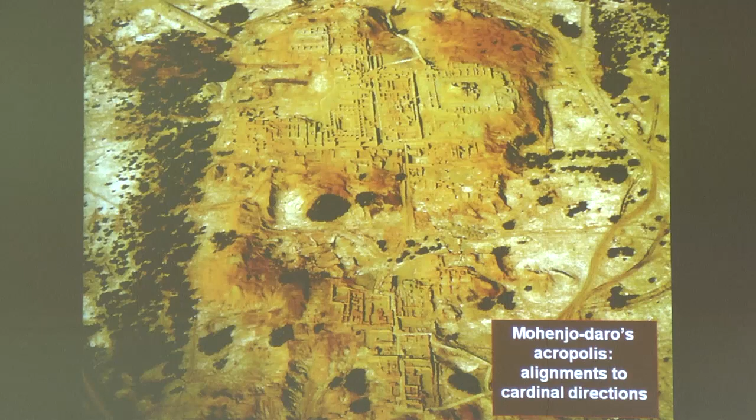But one thing which is immediately striking is that if you look at a plan like this, this is the plan for the Acropolis, that is to say the upper city of Mohenjo-daro, which sits on a mound, as you can see, and this mound is actually an artificial platform made of mud bricks of something like 7 meters in height, which was meant to somewhat insulate it from the regular floods of the nearby Indus River, which in those days were, of course, much more powerful in amplitude than they are today because of the number of dams which have been constructed on the river. And so millions and millions of mud bricks have been brought here, and then this was built over.

And you can see immediately that there is an intention. There is a plan. Some people, we will never know who, call them architects, call them civil engineers, sat down and decided that they wanted to build a city exactly like this. And like this means streets perfectly at 90 degree angles, aligned in addition to the cardinal directions. This is north, south, east, west, very precisely. And monumental structures, huge buildings, strangely, whose purpose most of the time is still uncertain.

The reason is that, for instance, in ancient Egypt, in every city, not quite, but very often, you can immediately point to the palace. You see the place where the pharaoh lived. It kind of stands out. It was meant to stand out. There was an architectural message given that this is where the ruler lives. There is no such architectural message ever given in the Harappan world, and you never know actually where the ruler might have been really living. Somewhere here, because this is the upper part of the city; the lower part is a huge area. We'll see only a small bit of it to the east of the Acropolis.

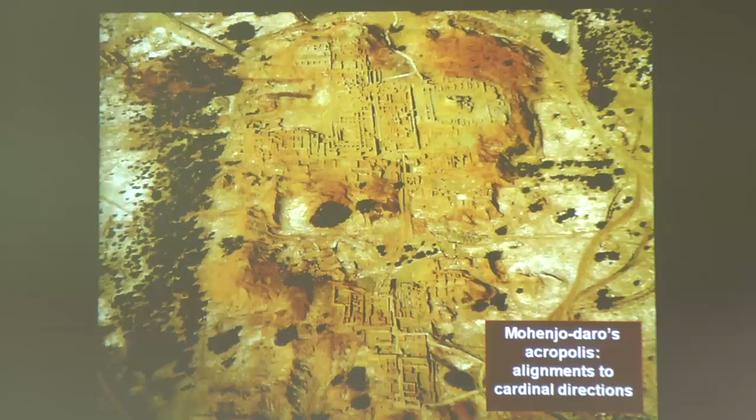And you see here a building which we will revisit. This is the Great Bath. This is an enormous building of nearly 23 meters in width and 69 in length. Perhaps it was where the ruler lived, but we don't really know because it's just an endless layout of rooms. There are pillared halls here. In fact, I could show you the plan more clearly with these indications. This is a pillared hall. This is the Great Bath, and this is the so-called college.

All these terms are a little bit arbitrary, including the term of granary, which many of you would have learnt in your school textbooks. And this colossal building with huge platforms, in fact, today nobody really knows anymore what it was used for. There is no direct evidence that it was ever used to store grain because no remains of grains have been found there. This is the closer view of the granary with all its platforms. The safest label that some archaeologists today propose is that of a warehouse, but to store what is again a mystery. It was quite enormous in size.

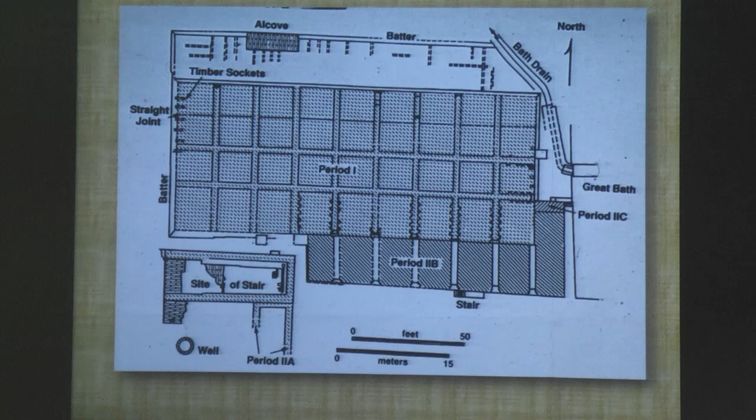You can see the complex of the Great Bath next to it. And there were all kinds of structures there to lower goods to platforms of different levels. But at the end of the day, what was being stored remains a little uncertain. These are some of these platforms here, which belong actually, strictly speaking, to different periods. They were not all of the same epoch. And there are some remains of timber sockets showing that there must have been a huge superstructure made of wooden beams over which some kind of a roof would have been laid. So this was certainly for storing something, but whether it was grain is not quite proven yet.

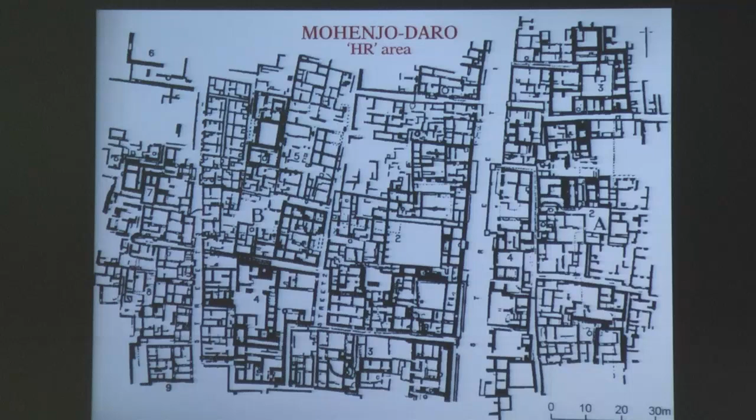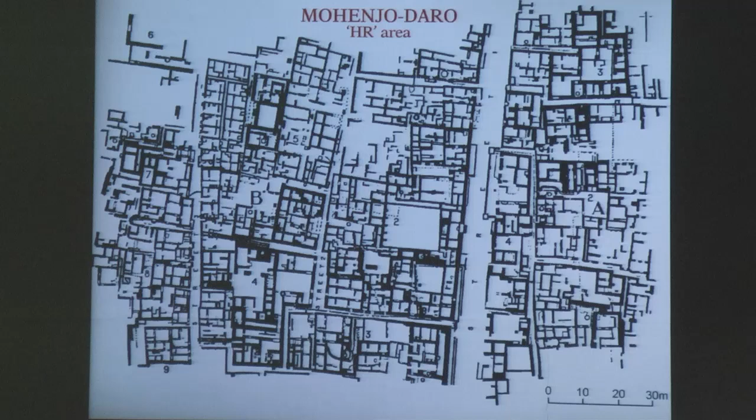And there are what seem to be big blocks between those streets. There are blocks which have been identified. And these blocks actually have individual platforms of mud bricks. They are not just constructed in a haphazard way. And these platforms have specific levels which will allow the whole sanitation system, which we'll see a little later, to work fairly smoothly.

So there is a considerable amount of planning which took place. And this is, in fact, more so than in cities of ancient Egypt or Mesopotamia, where usually only the area which was immediately around the pharaoh's palace or the king's palace in Mesopotamia had some form of planning, but otherwise the rest of the city at large resembled more what our modern Indian cities may look like.

And if you look at most Indian cities today, they're just not planned. They're just villages that kept growing and growing in an organic fashion. And you cannot make out a perfect geometric grid as we could do in the Acropolis and to some extent here also.

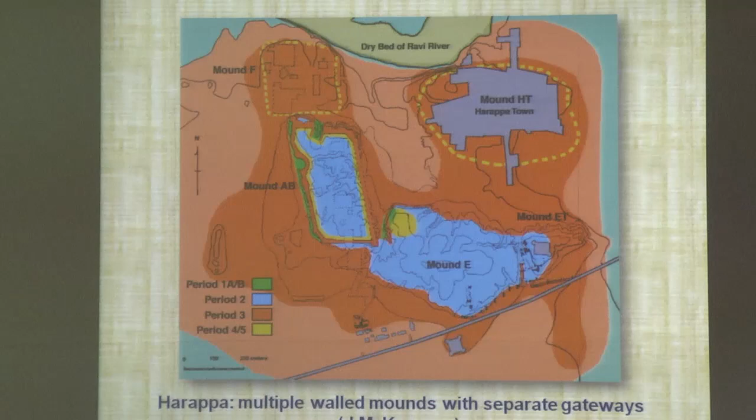This is a view of Harappa, where Harappa is a very complicated story because it was actually mined for its bricks in the 1850s, long before it was identified, long before it was understood to belong to a Bronze Age civilization. These bricks were so attractive. They seem to have modern proportions, I'm coming back to the bricks a little later. And the British railway engineers who were laying a railway line between Multan and Lahore needed something for their ballast.

And in Punjab and Sindh, you have almost no sources of stone. So they found this big mound which had millions of bricks, and they started mining them. They in fact laid a small railway line to evacuate the bricks from Harappa towards the railway line which they were constructing. And as a result, of course, they destroyed much of the city. So there are big gaps in the understanding of the total layout of Harappa.

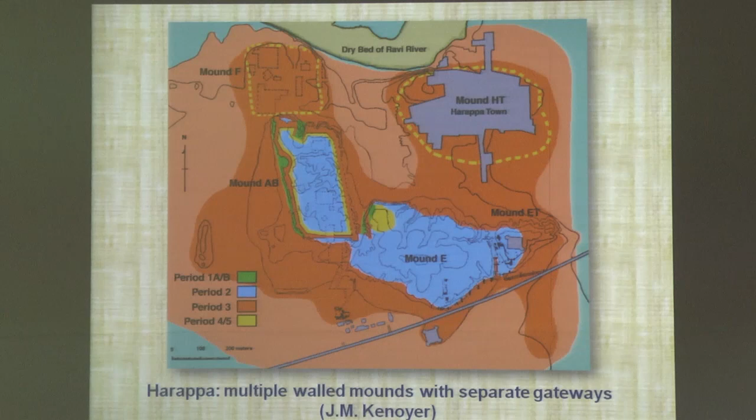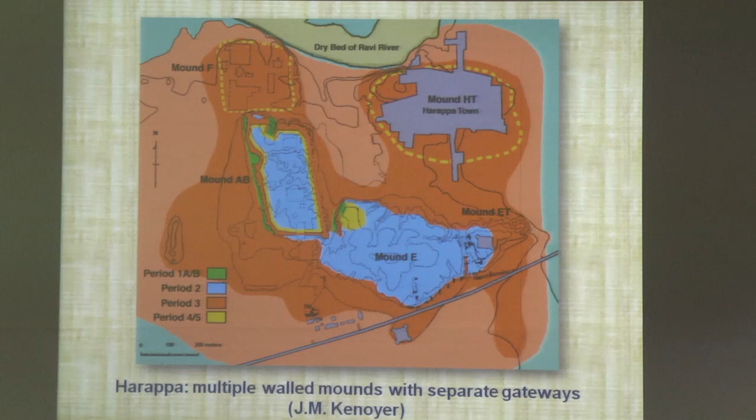Nevertheless, it's been under excavation by many archaeologists, including successive teams of American archaeologists, who have brought out a huge amount of data. And what we can see here is that it's not two regions as at Mohenjo-daro, but a number of mounds. There are at least 1, 2, 3, 4, 5 which have been identified. There might even be some more further away. And these mounds had their own separate fortified enclosures. So the exact relationship between them is not yet fully understood. They had their own separate gateways also. In fact, I think that I will have one picture of a gateway to show you later.

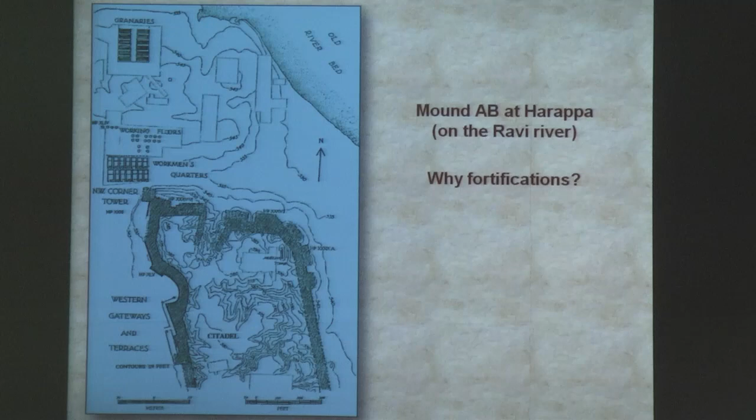But this is a close-up of the so-called AB mound here, where you can see the type of fortification enclosing the mound. And this faces, in a way which we will find again very shortly in India, the riverbed, and this is what is known as a recessed entrance. It's a narrowed entrance into the fortified area, which allows control, possibly for defensive purposes, but mostly for the movement of trade goods coming into or out of the city. It is with such narrowed entrances that you can easily control what's going on.

But then the question that people have asked is why have fortified cities at all? Because, once again, in many parts of the world, cities have happened without any fortifications. So why should Harappans be so keen on fortifying their cities? Many theories have been put forward. One, of course, is that they were used as defenses.

And this is how, in fact, Mortimer Wheeler, who first identified those fortifications here, as soon as he joined the Archaeological Survey as its Director General in the 1940s, I think 1946 if I'm not mistaken, or 45 perhaps, declared them to be defenses. And then he conjured up a whole warlike context. As you can see here, this was called a citadel, not an acropolis, which is a more neutral term.

The point is that perhaps some of the Harappan fortifications were intended to protect against raids by local populations or distant wilder tribal populations, possibly. But the fact is that there has never been any evidence of this at any Harappan site. There's no evidence of man-made destruction anywhere, no evidence of warfare of any sort. It may yet come up in future excavations, but as of now, Harappan civilization seems to be strangely unwarlike.

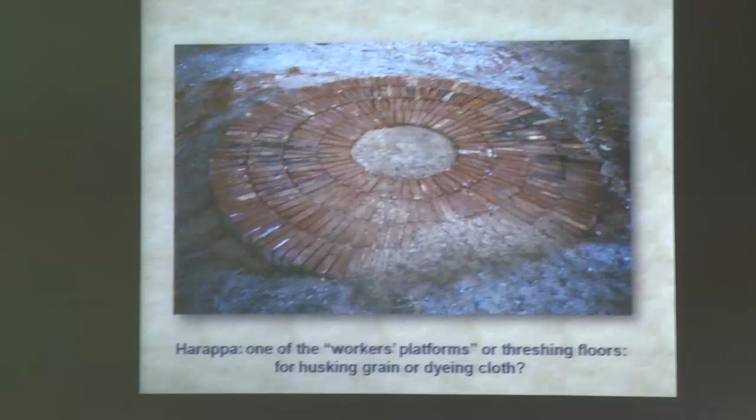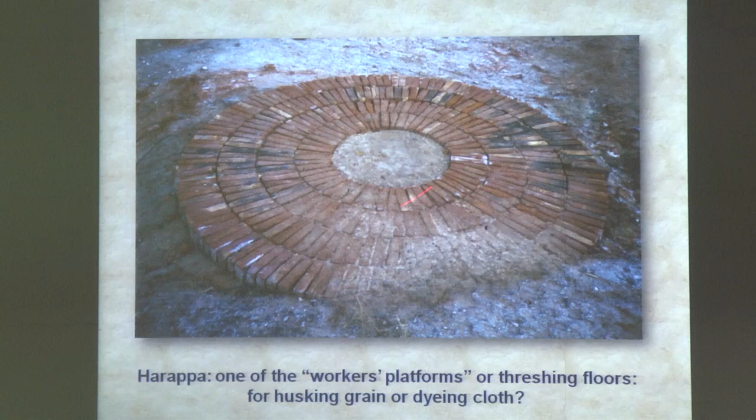Platforms have been found. These circular platforms are famous in Harappa, but the exact purpose again is unknown. Initially, they were thought to be used for husking grain, or perhaps having a mortar here. But this also has been questioned. They could also have been used as platforms for dyeing cloth. Again, these hypotheses are not fully answered.

Kalibangan also is known for this particular house, where we have its owners indulging in the luxury of having those flooring tiles. You see huge floor tiles of terracotta with the typical Harappan design called intersecting circles, which we will find on pottery and other artifacts. And this is also remarkable, because obviously it is a superfluity of life. It is a kind of luxury. It's a sign of a certain economic affluence. And those terracotta tiles were quite well baked and very, very well laid also. Otherwise, they would have been broken by usage, but they are still in quite good condition.

Banawali, there's not much to say. This is a site on the Saraswati again. The Saraswati flows here. It's a site which unfortunately has not been much excavated, only partly, but yet we find here a different kind of layout. So you see there are variations.

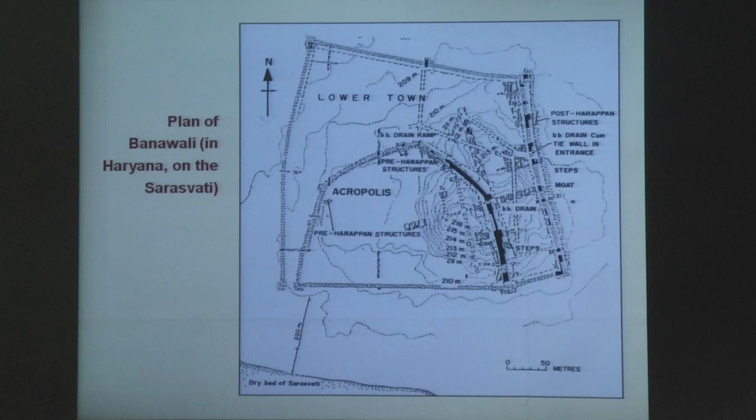The Acropolis is here, this kind of semi-oval shape, whereas the total city is somewhat squarish. So there are variations in the town planning. It's not as if the town planning is strictly imposed in every case, but then there are enough features from city to city which are quite recognizable, including the drainage system, but this I will come to a little later.

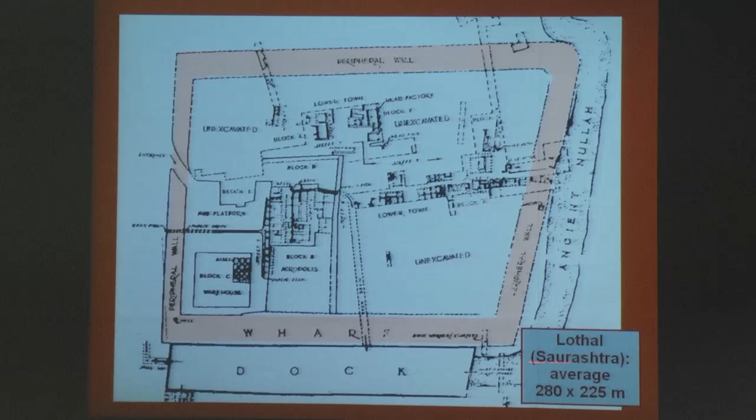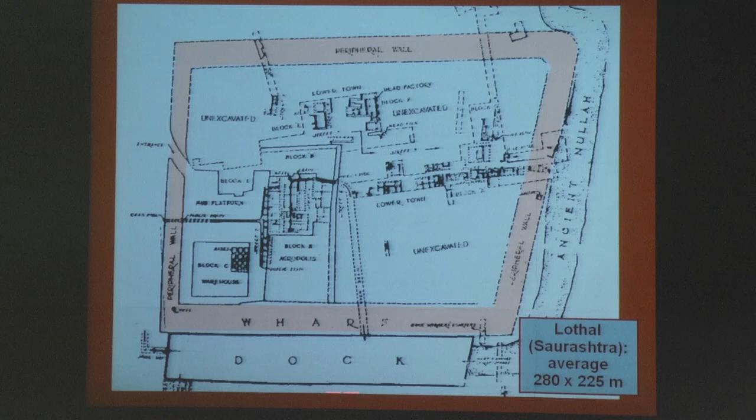So we continue our brief travel through this civilization with Lothal, which is actually, this is wrong. It is not exactly in Saurashtra, just on the border of it. It is south of Ahmedabad. And this is a small site, but of great importance because of its famous dockyard. I'll return to it in a moment.

You have here fortifications enclosing the city, or the town rather, and this is the Acropolis, or upper part of it. And we can probably suspect that the rulers would have been living in this complex here. The rest is a lower town consisting of all kinds of habitations, small workshops, various manufacturing units.

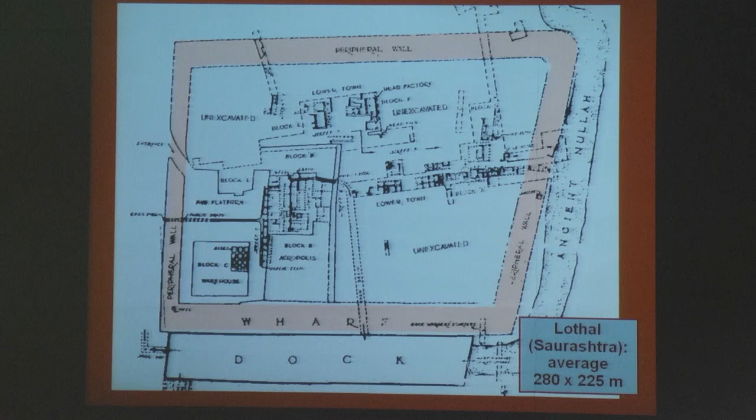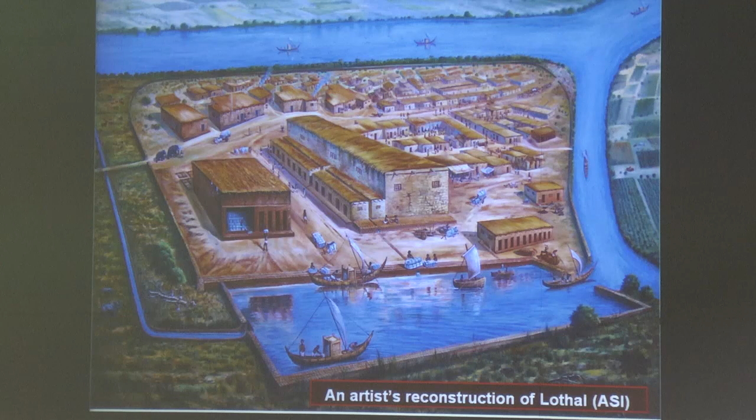This is another photo of the dockyard, 217 meters in length. Even today, it can still store water after the monsoon. And its walls were made of fired bricks, baked bricks of high quality, though they are disintegrating fast nowadays. And the whole town was on this side of the dockyard. The dockyard was identified as a dockyard.

There was some controversy. Was it really a dockyard for boats to come from a tributary of the Sabarmati River all the way up here? Or was it simply a kind of water storage facility? But in that case, such a huge reservoir for such a small settlement would not have made much sense. In fact, the point is that marine organisms have been collected from the sediments at the bottom, and therefore there is a proven contact with the sea, plus the fact that the walls are vertical.

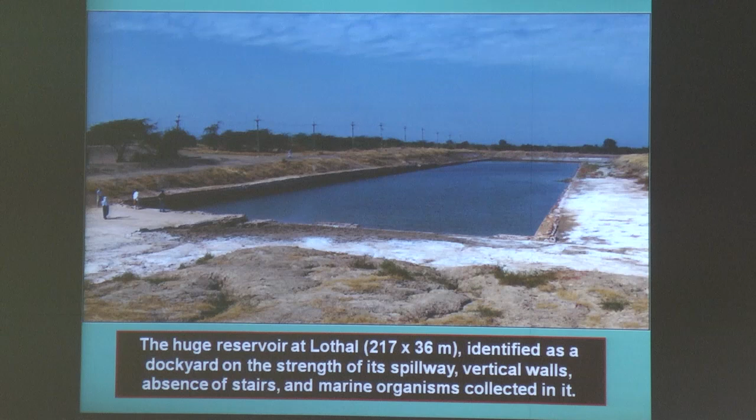If it is a water reservoir, as we'll see in Dholavira very soon, you would expect steps leading down so that you can go down to the water level as it recedes. This is not the case. And then spillways here at both extremities, which seem to indicate a control over the water level. So all these points together seem to argue in favor of the dockyard.

So this is known to be a warehouse because at some point it caught fire. It must have had, as most Harappan buildings, a superstructure of timber and some kind of thatching. And luckily for us, during this fire, more than 60 Harappan seal impressions, not the seals themselves, but impressions over lumps of clay, were actually accidentally burnt, baked by this fire, and therefore well preserved.

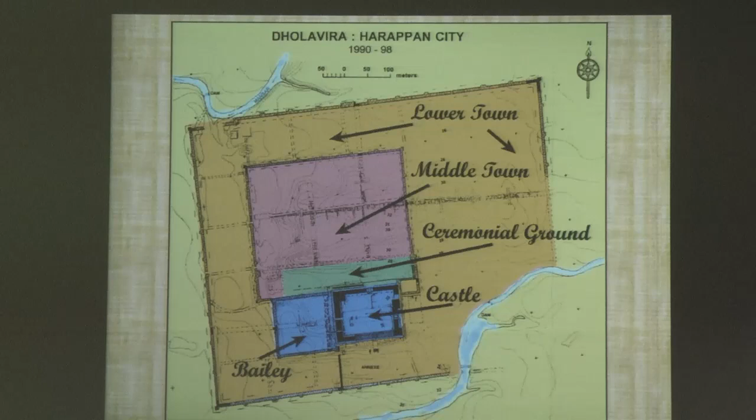And here we have not a division into 2 parts, but a division into 3 parts. There is an upper city, middle, and lower. The upper is here in blue. There is a so-called castle, which is a heavily fortified area. We'll see it a little better later. And a bailey with lots of habitations. The rulers, again, are probably residing in this so-called castle. It would make a lot of sense from an architectural point of view. And it's on a higher ground also.

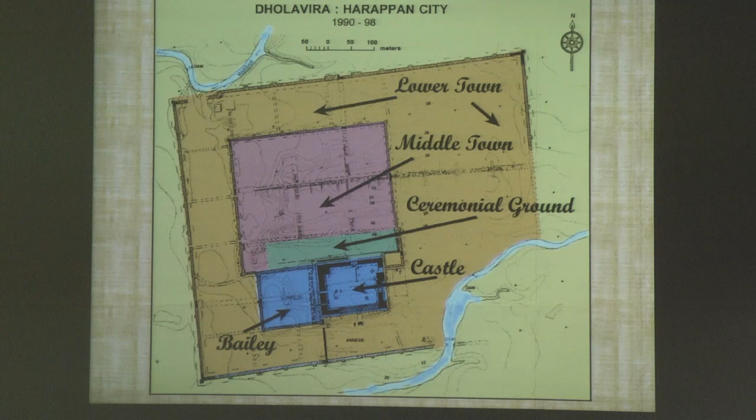And then you have here the middle town, enclosing also a huge ceremonial ground of something like 285 meters in length, which is a flat ground with a plastered ground. It was a kind of a pink clay plaster which was applied all over it, and stairs on both sides, actually platforms creating stairs a little bit like this auditorium so that people could sit at different levels.

So what exactly was happening on this ground? Well, we can use our imagination: some rituals, some sports, or some games, or some marketing, melas. We don't really know, or perhaps all of them. The middle town had most of the habitations, and there were some more here in this part of the lower town, but all the rest of the city was used for water storage. I'll come back to that in a minute. Let me proceed with a few pictures of Dholavira.

Why exactly such thick walls? If it was purely for defensive purposes, you don't need this kind of thickness. It's not necessary. There can be many explanations, including possibly the rulers having their residences right on top, because it would be much cooler exposed to the breeze than if they lived right in the middle. This is actually proposed by the excavator, Dr. Bisht, and it makes a lot of sense.

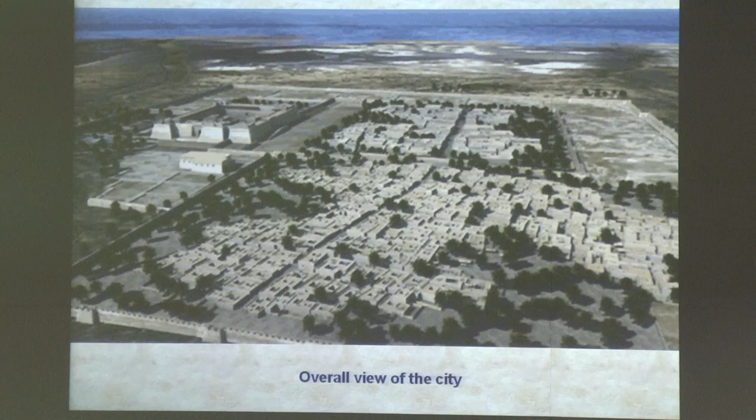I forgot to say that these fortification walls, this is another view, actually have a core of mud bricks, but both sides are built with massive stone. This is stonework because there was a stone quarry a few kilometers away on this island in the Rann of Kutch, and stone constructions are not seen in Sindh or Punjab because, as I said, there's no stone at all. But here, because it was available, the Dholaviran engineers made the most of it, and most of the foundations were laid in stone. So for the fortification walls, we have a core of mud bricks and 2 flanks of stonework, which you can see here.

And in fact, these were a kind of mineral material which was embedded in a wooden plank. Now, the wooden plank has disintegrated. There's almost no wooden remain at all in the entire Harappan civilization, unfortunately. And this material remains, but the dimensions suggest that this might have been a signboard hanging right over this northern gate of the castle.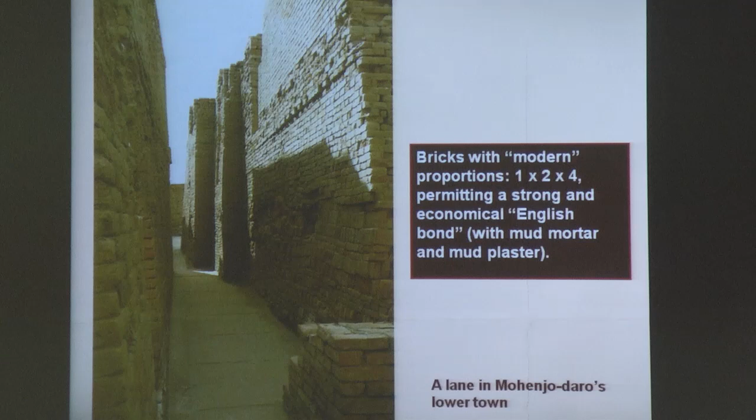In fact, I should have said briefly that you see these multiple layers. What looks like different layers are not different stories. You can see the difference in height. They are simply different levels of reconstruction of the city as it gets flooded by the Indus. And when the Indus floods, it deposits huge amounts of sediments, which it has carried all the way from the Himalayas. So the Mohenjo-daro builders, strangely, rather than try to evacuate the sediments every time, preferred to rebuild their habitations on higher and higher grounds. This is what this photo seems to say.

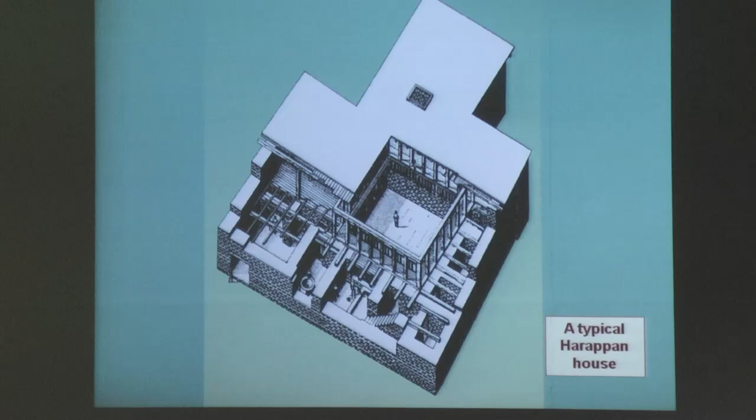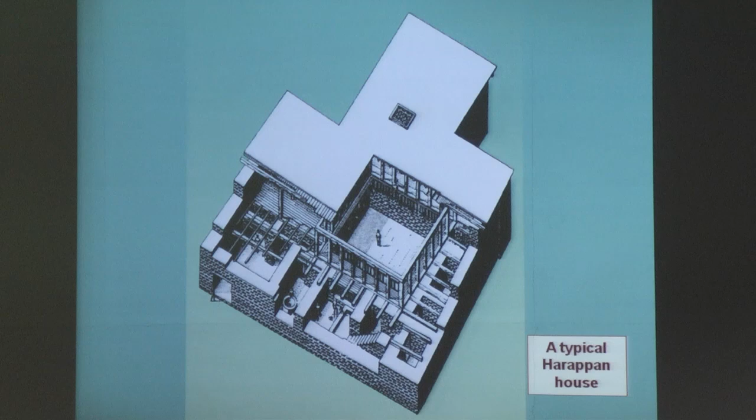This is a design of a typical Harappan house with a central courtyard and rooms organized around it. And this is a design that will live on, that can still be found in many traditional houses in rural parts of India because it's so convenient and well adapted to hot climates in particular. This is one photo of a very large single house in Mohenjo-daro, where you can see multiple rooms.

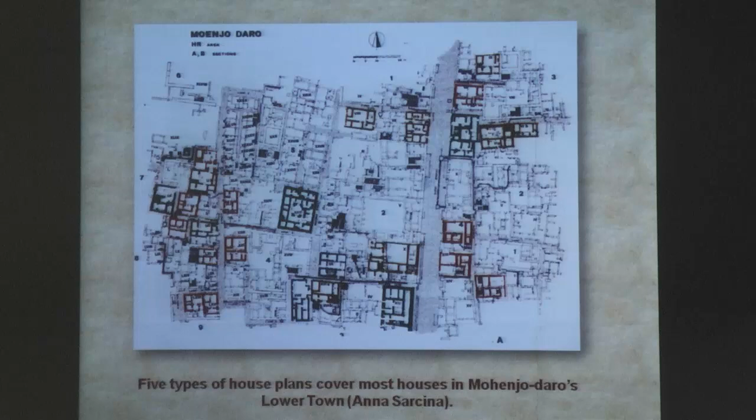But let me rather show you this plan, because one lady, Anna Sarcina, an Italian scholar, long ago did a meticulous study of all the house plans and found that there were 5 types of them, and basically not more. There could be variations, but basically there were 5 master plans for the houses, which were repeated on and on. She has classified these and given the specific details for each of them. You could almost call them BHK1, BHK2, something like that. It's not exactly the idea. It's not purely size, but this is how it works.

The largest have this central courtyard around which all the rooms are organized. So even in the types of housing, somebody has given a standard to be followed, at least in Mohenjo-daro. This is quite remarkable. That means nothing much is left to chance.

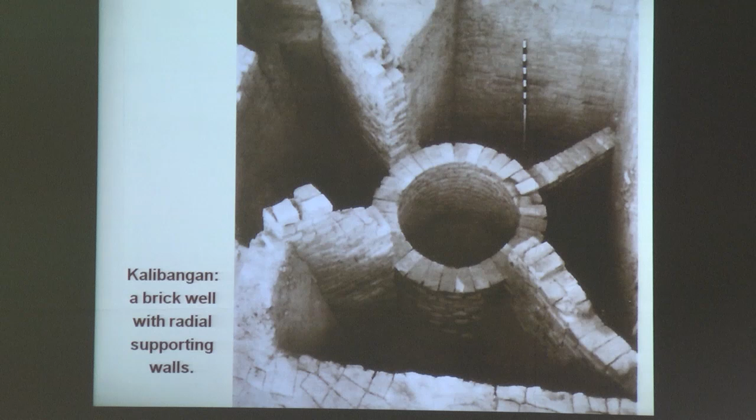So that's the difference. So the Harappans, and this is from Kalibangan, of course had a huge excavation around. They made a very big cavity, which is a lot of work, if you consider that Mohenjo-daro had an estimated 700 cylindrical brick wells. And here what we see, and it's very interesting, is that they built from the bottom, as I said, which with a high water table must have created a lot of difficulties. We're not really sure how they did it.

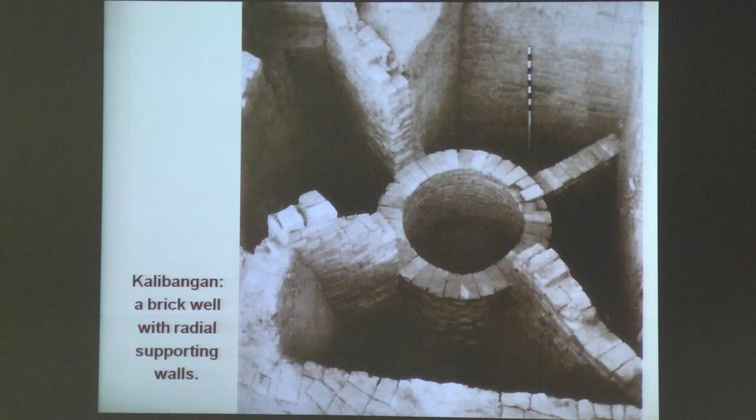But then also, before closing this huge excavation, filling it back with mud, they created these buttressing, supporting walls so that the structure would be very solid. So they had a certain sense of the strength and weakness of structures.

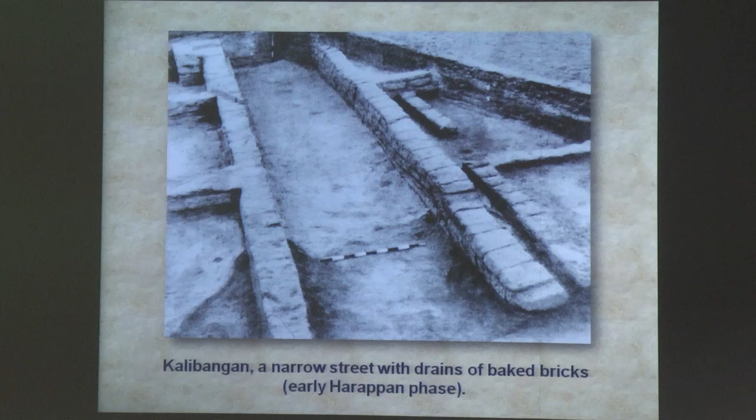Sanitation is a hallmark of the Harappan civilization on a much wider scale than in contemporary cities like Egypt or Mesopotamia. And interestingly, it is visible in a few sites even before the phase of urbanization, which, as I mentioned, begins about 2600 BC. This is about 200 years earlier in Kalibangan, where we can already see a neatly straight street with some drains of baked bricks running alongside. So this is even before the urban phase. So we can see that some of these inputs must have matured much earlier.

And there would be openings, kind of manhole covers or slabs at regular intervals, because it's very nice to have a drain, but if you don't have a force to maintain it regularly and clean it, it's going to be clogged in no time at all. So Harappans were aware of this, which is why we can say that there was some kind of a municipal force to maintain the drains.

But what's remarkable from an engineering point of view is that Michael Jansen, this German archaeologist whom I mentioned earlier, has measured the slopes of the drains, and he found that they are 1 to 2 centimeters per meter, more or less all over the city. So this means a tremendous amount of calculation and planning to make sure that the initial levels and the lower levels are going to allow this kind of a slope. If you visit my city of Coimbatore, any substantial rainfall will cause all the drains to overflow because they don't have a slope.

So you see, these are problems which we are still grappling with millennia later. A quick view of how it would work within a house. This is actually one house here, and you have a private well. Some of the wells in Mohenjo-daro were private, some were public. And you have the bathroom here.

So by bathroom, of course, we should not picture some of our luxurious bathrooms. These are modest bathing platforms, but still almost every house in Mohenjo-daro and Harappa had such bathing platforms. And this internal drain takes the dirty waters below the boundary wall. And you can see the very nicely adjusted curve, all this made of baked bricks.

And you can see here a sump, so the purpose of the sump is obvious. It is meant to allow any solid matter to drop down there, and for maintenance of the drain, because here this is a public lane, then it's going to be much easier. So you can see the amount of thinking that it takes, and to ensure again the proper levels so that the water can flow.

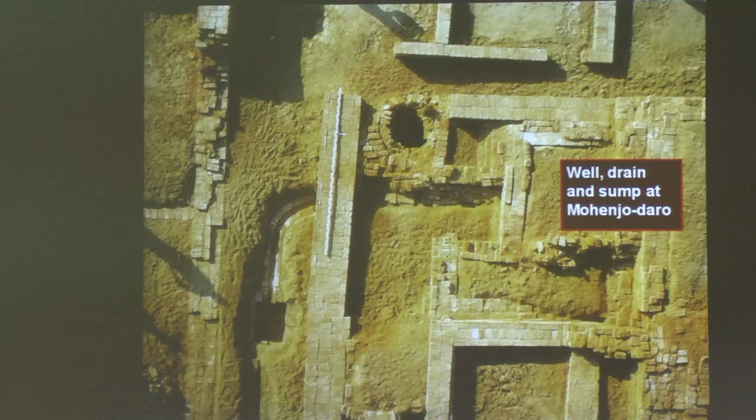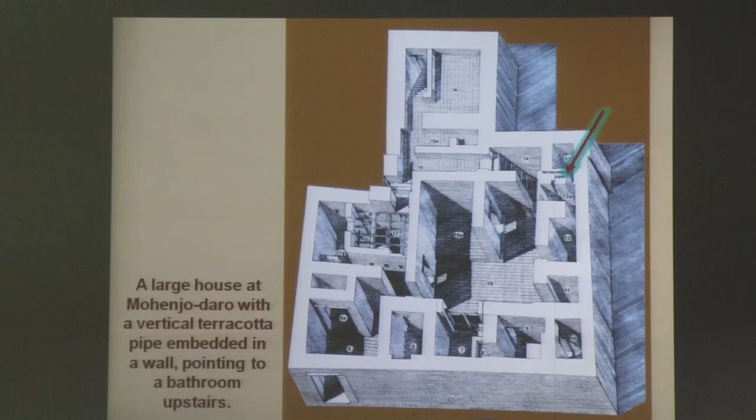A quick view of a typical large house of Mohenjo-daro. I'm showing it only for one purpose, because it happened to have a pipe of terracotta, segments of terracotta assembled together, vertically embedded in a wall. Now this is amazing and totally unexpected, because it shows that there was some water activity going on the first floor, and it must have been probably a bathroom.

So the conclusion would be that the owners of this house probably lived on the first floor, which is advantageous because it would mean a lot less dust and noise. The streets in Mohenjo-daro were not paved. They were just covered with mud. So the whole city would have been pretty dusty. And probably the servants would have worked in the ground floor.

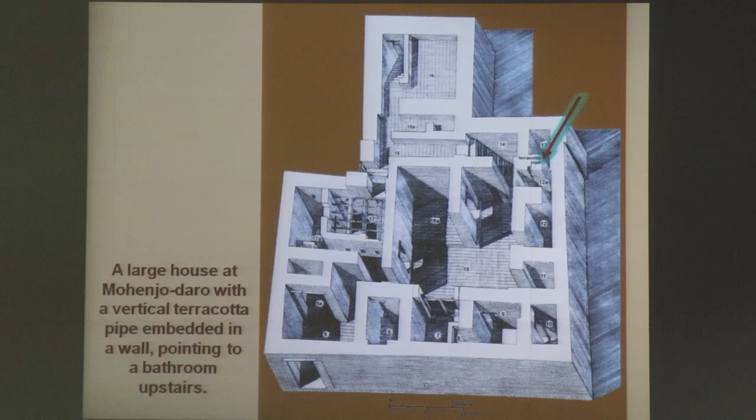Water management is one, perhaps my last but one area I would like to cover. Can I have another 10 minutes?

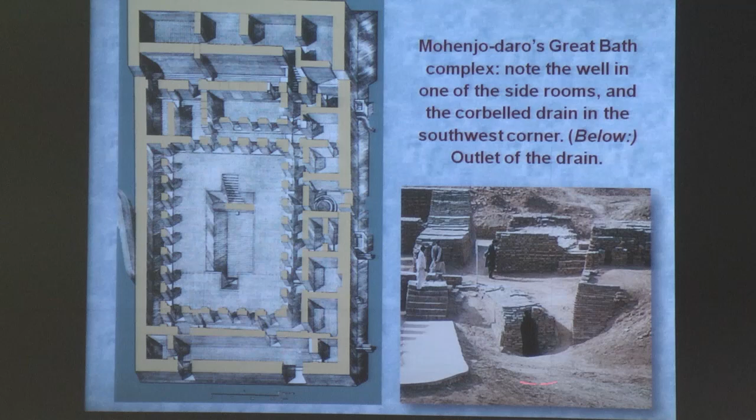This is the outlet of the drain a little further down. And you can see, in fact, here a better view of it. This is the drain. And you can see that this is what is called technically a corbelled drain. Corbelled because you have different levels of bricks till they join.

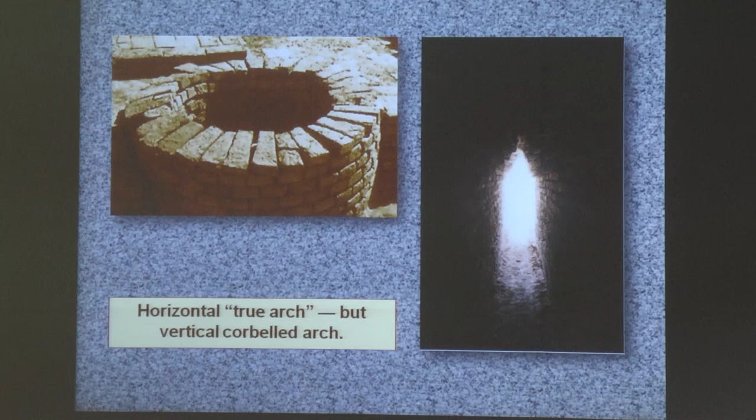Now, I'm just making a small reflection here from an engineering point of view, which is that I always wondered why the Harappans did not invent the true arch, because actually they had it. This is nothing but the principle of the arch, but it was horizontal. It never occurred to them to flip it vertically and use true arches, whereas instead they use corbelled arches. To my knowledge, the earliest true arches in India date back to the 1st or 2nd century AD. You can see them in Kaushambi, for example, on the Yamuna. But the Harappans did not know the true arch.

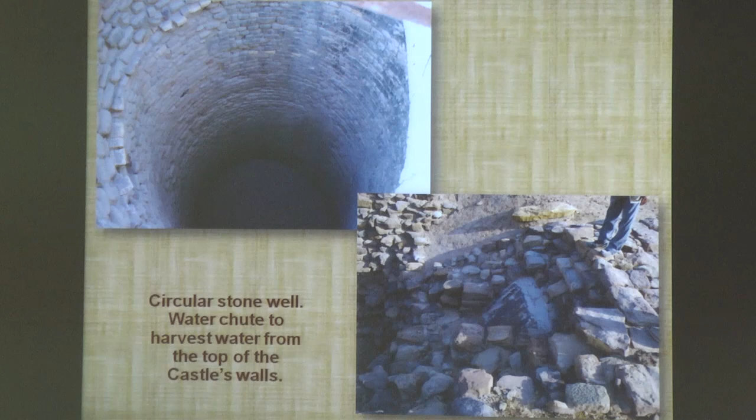This is from the top of the castle fortifications, where we can see here a strange, highly polished, big stone slab, and actually it is part of a structure which is meant to channel whatever rainfall would hit the top of the fortification walls, channel it into a kind of funnel shape all the way into those underground drains which I just mentioned. So very sophisticated thinking, planning, and execution to make sure that basically not a drop of water is wasted.

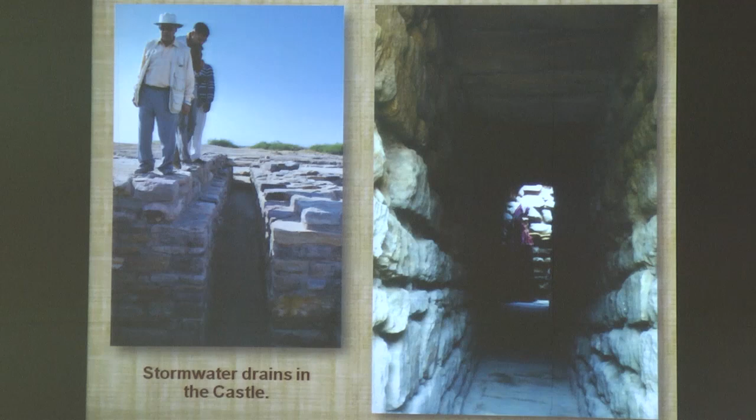It tells us that the Harappans were expecting massive rains once in a while, especially of course during the monsoon, but possibly at other times, and they didn't want to waste any of it. So therefore they built those enormous drains, even though the average rainfall is extremely scanty. So it's not a question of average, but it's a question of capturing the peak rainfall.

This is in another part of Dholavira, one such underground drain, which you can notice simply by the top covering slabs, and this manhole cover. So this manhole allows somebody to go into and clean whatever needs to be cleaned.

Now, apart from the sequence of reservoirs I showed in the earliest plan, there were some man-made reservoirs very close to the castle. And this is the colossal eastern reservoir. You can see the dimensions here for yourself. It's enormous, almost as long as a football ground, and something like 20,000 cubic meters at its peak. There are three stairways leading down into it. You can see two of them here.

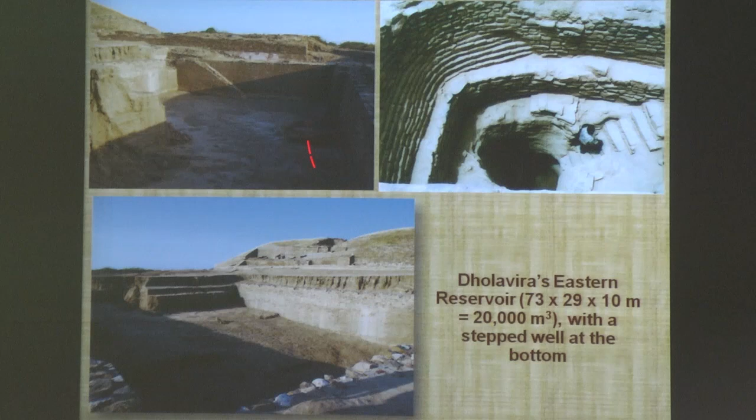And in addition, there is a curious structure known as a step well at the bottom of it. This is it here, but you can't see it today anymore. It's partly covered, which is intriguing. Was it made at the same time as the tank, in which case it would be a kind of an extension of the tank, of the reservoir, or is it a slightly later structure? It's hard to say. But this is possibly the earliest step well in India, of course, of simple architecture.

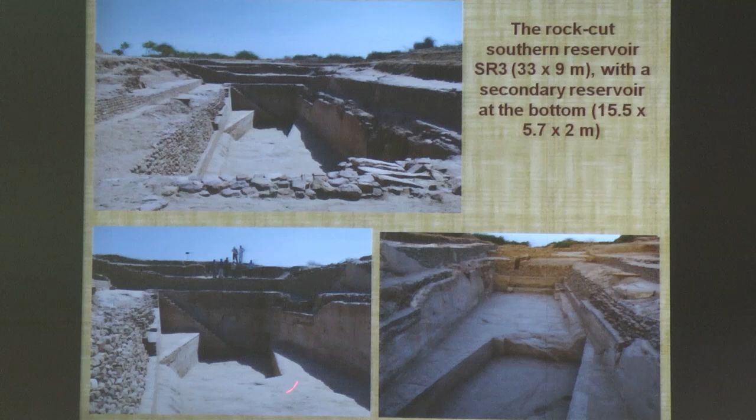This is a reservoir carved in stone, and you can see the amount of work this would represent. It's 33 meters long. It's actually a double reservoir. There's a secondary reservoir within it, and I'll come back to it in a minute. And all these reservoirs again are interconnected with underground drains. The advantage of it, obviously, is that if for any reason one reservoir happens to be full or even to overflow, it can pass on this excess of water to the others. So it's a chain of reservoirs, strictly speaking.

So you can see that there's a considerable amount of thought given to how to make this city in the Rann of Kutch, which today has no city whatsoever, livable through the year, when you might have no rainfall apart from the monsoon. And well, they tackled the problem, and the city stood for something like 600 to 700 years. So they were able to really adapt to this difficult environment successfully.

Finally, a few quick words on metrology and proportions, which strictly speaking are part of civil engineering. I will not say much about the series of weights that the Harappans were using. This is for trade, control of goods and so on. It followed two systems. The first weights, starting from 0.86 grams, followed a geometrical progression. Every successive weight was twice as heavy as the preceding one.

But then instead of continuing this series, the Harappans switched to multiples, 10 times, 100 times, or 1,000 times the previous weights. For some reason, we don't really know why. So this means that they were also familiar with the concept of multiplying by 10 or 100 or 1,000. But more important to us today are some concepts of proportions which I want to expand upon.

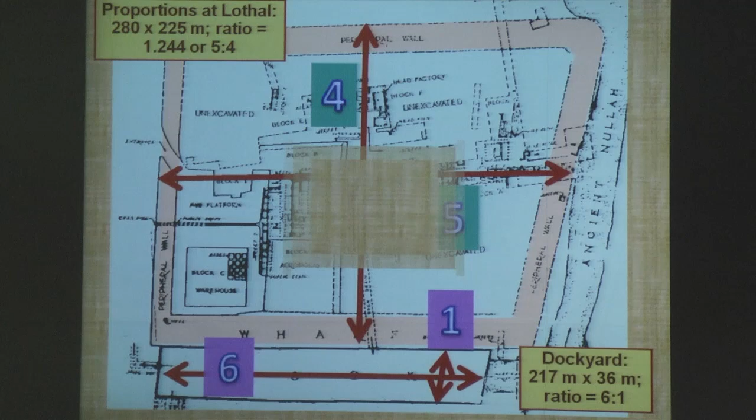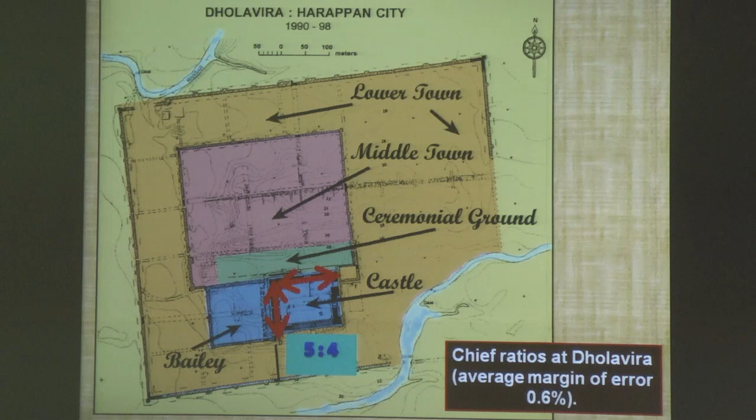Lothal also has 5:4 if you take the middle point here quite precisely. The dockyard is exactly 6:1, etc. And Dholavira is the most striking of all because it has 5:4 exactly for the castle. It has very, very precisely 5:4 over the entire city. The margin of error is 0.01% for the overall city, and that's 771 meters in length.

So why were they doing this? It takes a lot of labor, additional effort, which actually has no utilitarian purpose. It doesn't make any difference whether you have this ratio or something else in actual practice.

Then you have also exactly 9:4 repeated twice between the length of the castle and that of the middle town, and once again 9:4 to the outer city. 6:1 is for the ceremonial ground, the same ratio we saw at the dockyard of Lothal. 7:6 for the middle town. We can begin to see something going on, and it continues even for the reservoirs.

There also they did not believe in leaving things to chance. They wanted to impose strict ratios. So this is exactly 5:2, and here we have also ratios of 7:2, 11:4, etc. So I did a little study, in fact, I published a few papers on this, where I showed that every major structure unearthed so far obeyed one of these ratios. And you could be falling between some of these simple fractions, but you do not. You are always right on a simple fraction.

So there is a philosophy here behind. Is it exactly something similar to the later concepts, I insist on the word later, of Vastu Shastra? Some people rush to say that Harappans were following Vastu Shastra. No, I don't think we can make such a claim. But it is true that in Vastu Shastra, you have this concept of proportions given.

For example, Varahamihira says that for the quarters of the king, the length should be equal to the width plus 1/4 of the width. Now, width plus 1/4 of the width means that the length is exactly 1.25, 1 1/4. So that's 5:4. That's the ratio 5:4 which we have found here. And you see, it's there in many traditions of India.

For example, the builder of the Jantar Mantar observatories, Maharaja Jai Singh, his title was Sawai Jai Singh. What does Sawai mean? It means exactly 1 1/4. So this tradition is a notion of increase. You add a quarter because it's considered a sign of growth, perhaps expansion.

And finally, I played around with the numbers and calculated what could be the likeliest unit of length that the Harappans used to design Dholavira, and I found that the unit of 1.9 meter gave beautiful numbers all around, but this is a detail, we can leave it for the time being. I think I will just skip those details, except that these are the ratios for all the reservoirs, and I found that my unit, even at short lengths of reservoirs, was giving almost perfect results. So anyway, let me skip those details.

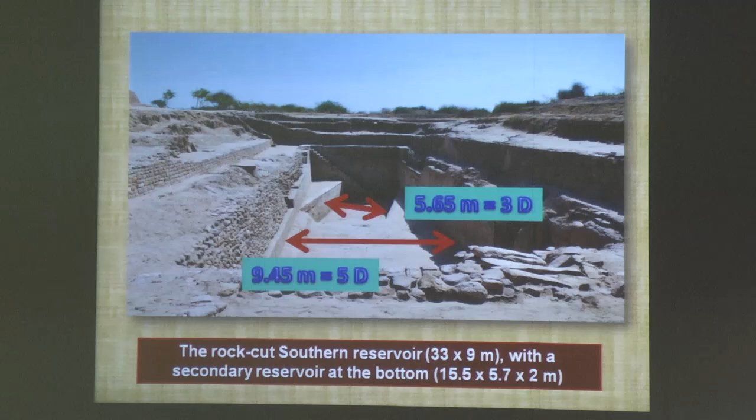They are rather secondary. The point is that we find a sense of order and a systematic use of proportions and possibly linear units in the Harappan world. Even small units like this angula, but I will leave these details for your later study. It doesn't matter much for today.

I want to conclude on a remark that this standardization on town planning, as I showed, is not a rigorous standardization, not that all sites follow exactly the same plan, but the concepts are shared between all the sites without doubt. A certain standardization of sanitation, of construction techniques, for example, the brick proportions are identical all over the sites.

So this means that either there was an almighty emperor who imposed all these standards, and it seems quite unfeasible with an area of 1 million square kilometers, or rather, and this is the present thinking of many archaeologists, there must have been communities of builders, communities of town planners, people we might call architects today, just as there were, of course, communities of potters,

of seal makers, of craftsmen, and therefore this might be the mechanism by which these concepts and standards were shared, allowing some variations regionally, but nevertheless very efficiently and remarkably shared over the entire region, which is how we can identify those sites as sharing one common culture.